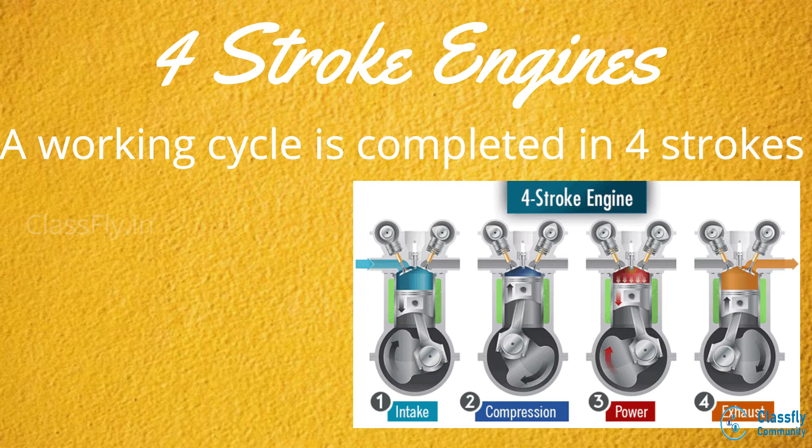Here, two revolutions of the crankshaft will complete one cycle. The four different strokes performed are suction stroke, compression stroke, power stroke and the exhaust stroke. Four-stroke engines are commonly used as a four-stroke petrol engine and a four-stroke diesel engine.

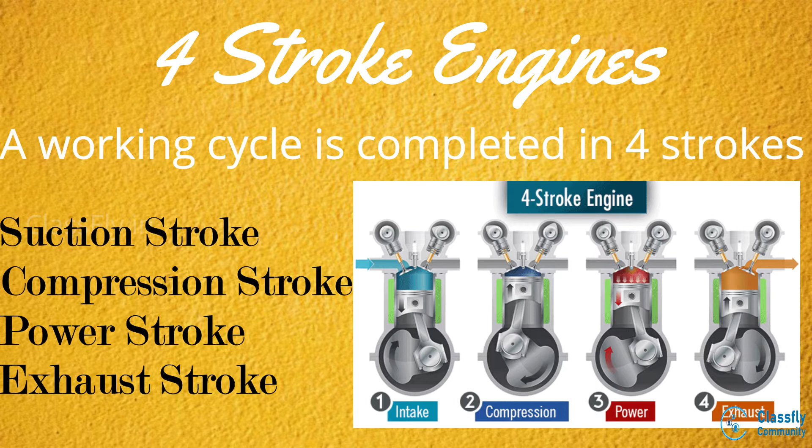Now let us study the working of a four-stroke petrol engine. A four-stroke petrol engine works on the Otto cycle, that is, the combustion of fuel will take place at a constant volume. The charge used in this engine is a mixture of air and petrol. This charge will be ignited by the sparks generated by a spark plug.

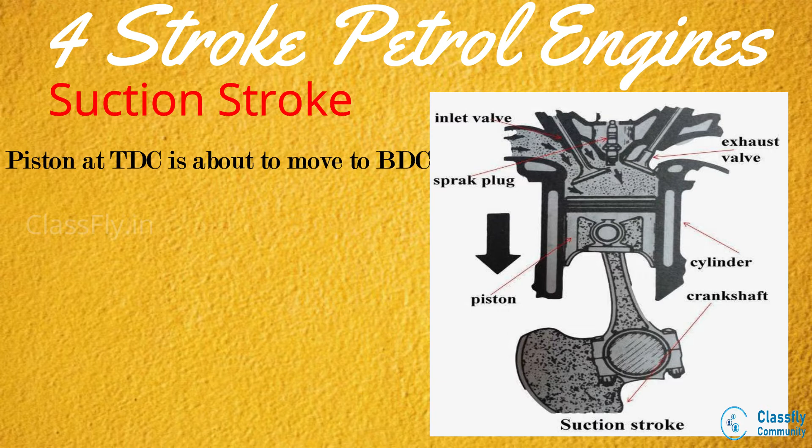Now let us study its working. First, the suction stroke. In the beginning of this stroke, the piston will be at its top dead center and will be about to move towards the bottom dead center. At this instant, the inlet valve is opened and the exhaust valve remains closed. The downward movement of the piston will create a space in the cylinder head and hence a partial vacuum.

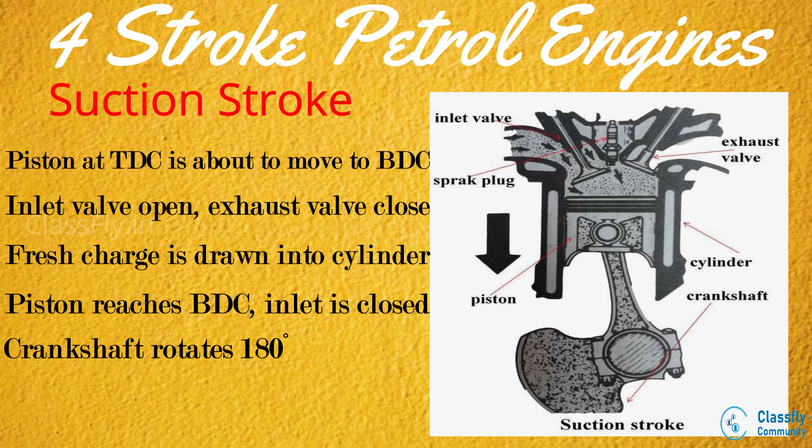Due to this, a fresh charge of air and petrol mixture will be drawn into the cylinder through the inlet valve. Now, when the piston reaches the BDC, the suction stroke ends and hence the inlet valve is closed. It is notable that after the completion of this stroke, the crankshaft rotates through an angle of 180 degrees, making half revolution.

Next, the compression stroke. In this stroke, the piston which is at the BDC will now move to the TDC. Both the inlet and exhaust valves will remain closed. As the piston moves upwards, the air and petrol mixture in the cylinder will get compressed to a high pressure and temperature.

This compression process will be adiabatic, that is, there will be no heat transfer between the system and the surrounding. Now, when the piston is about to reach the top dead center, the spark plug will initiate an electric spark that will ignite the air-petrol mixture. Hence, the combustion of fuel will take place at a constant volume, since the quantity of fuel inside the cylinder has not changed. Due to this, these engines are also called constant volume cycle engines.

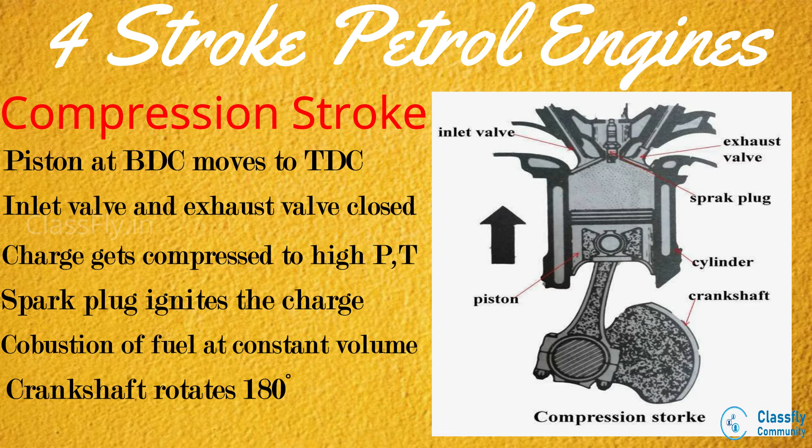Hence, after the completion of this stroke, the crankshaft rotates by another 180 degrees, now together making one complete revolution. The energy required for the suction stroke and the compression stroke's piston movement is taken from the flywheel.

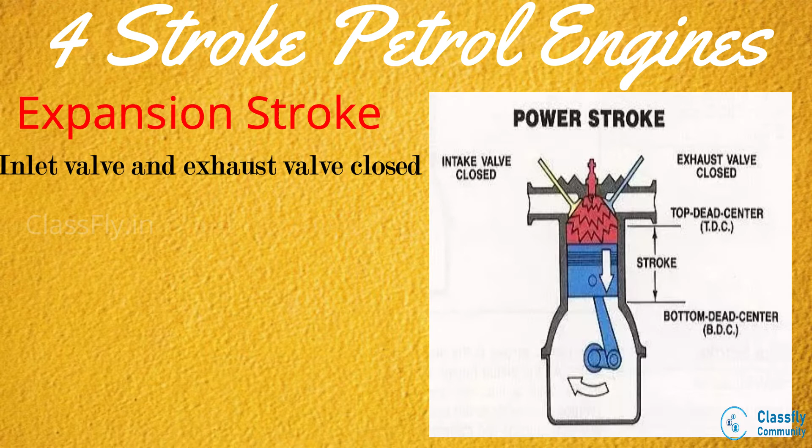Next, the power stroke. In this stroke, both the valves will remain closed. As the combustion of fuel takes place, the burnt gases will expand and hence exert a large force on the piston. This will cause the piston to move rapidly from the top dead center to the bottom dead center.

Hence, this force will then be transmitted to the crankshaft through the connecting rods. This will cause the crankshaft to rotate at high speeds. The crankshaft then transmits the power through clutches, gears, etc., to turn the wheels of the vehicle.

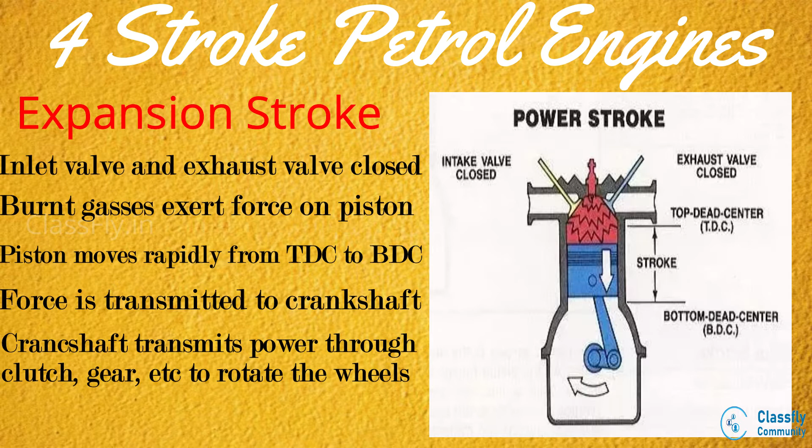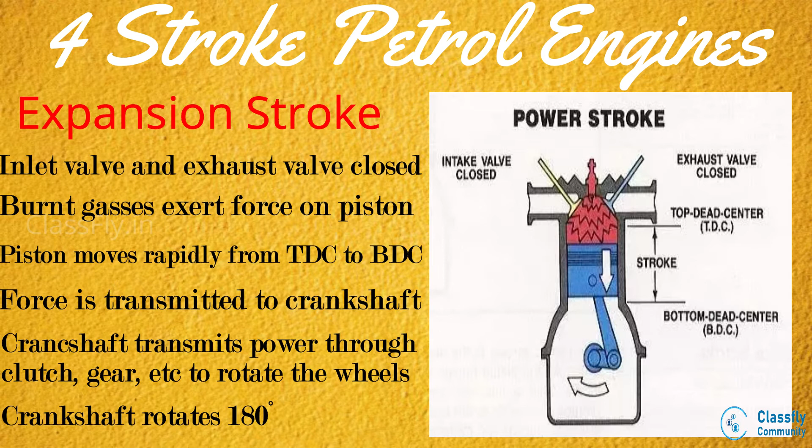The expansion of the gases taking place in this stroke is also adiabatic. Since the actual power is produced by the engine in this stroke, the name is power stroke. At last, we have the exhaust stroke.

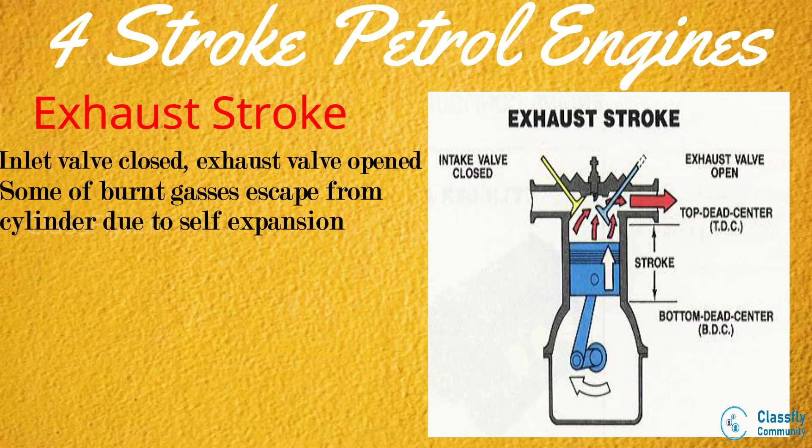At the end of the expansion stroke, the exhaust valves will be opened, while the inlet valve will still remain closed. A part of the burnt gases, due to their own expansion, escapes out of the cylinder through these exhaust valves. Now, the exhaust stroke will begin when the piston starts moving from the bottom dead center to the top dead center. The energy for this stroke will be supplied by the flywheel, which has absorbed the previous stroke's energy.

Now, as the piston moves upwards, it will force the remaining burnt gases to move out of the cylinder through the exhaust valve. Hence, when the piston reaches the top dead center, all the exhaust gas is moved out and the exhaust valve will close. This will complete one working cycle.

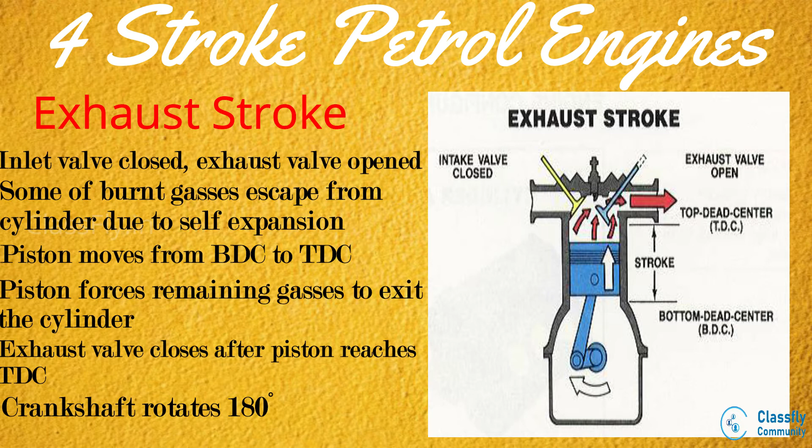The same cycle will be repeated again and again to produce continuous power. The crankshaft will complete one more revolution on the completion of the power stroke and the exhaust stroke. Hence, one working cycle is completed when the crankshaft performs 2 revolutions.

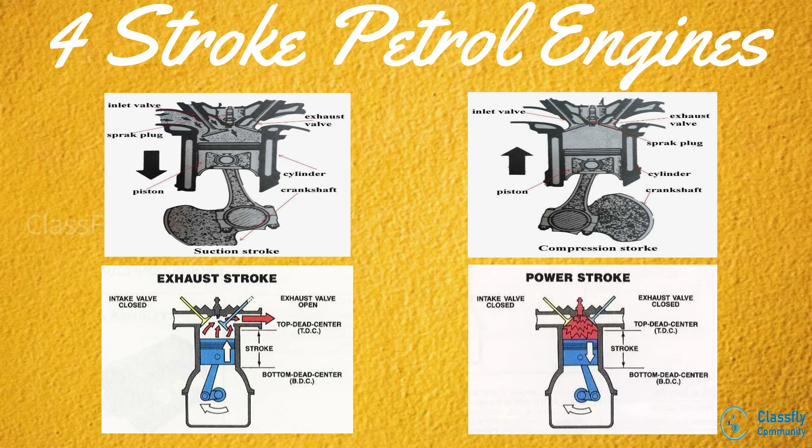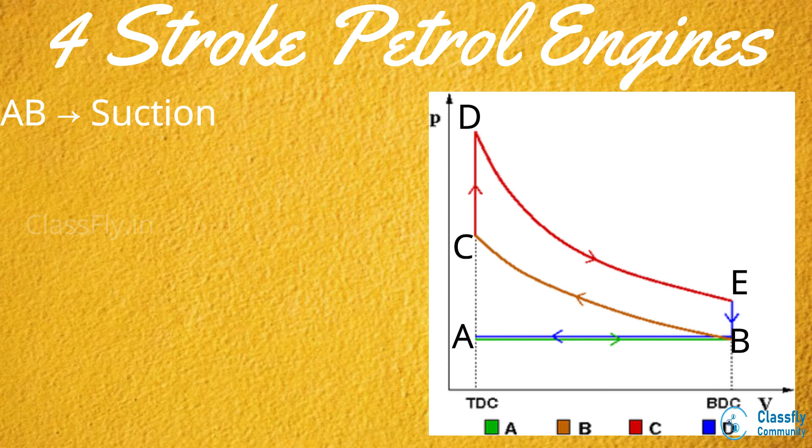Now let us look into the PV diagram, that is the pressure volume diagram for these engines. The suction of air in the suction stroke takes place at atmospheric pressure. Hence, the line AB represents the suction stroke. Now, in compression stroke, the compression of the gases takes place adiabatically, which is represented on the curve BC.

In the same compression stroke, the combustion of fuel will take place at a constant volume. This is represented by the line CD. Now, the expansion of the exhaust gases takes place adiabatically in the power stroke. This is represented by the curve DE.

Also, the drop in pressure occurring from the discharge of gases due to their own expansion happens at a constant volume. This is represented by the line EB. Also, the discharge of the remaining burned gases to the atmosphere happening in the exhaust stroke takes place at atmospheric pressure. Hence, this process is represented by the line BA.

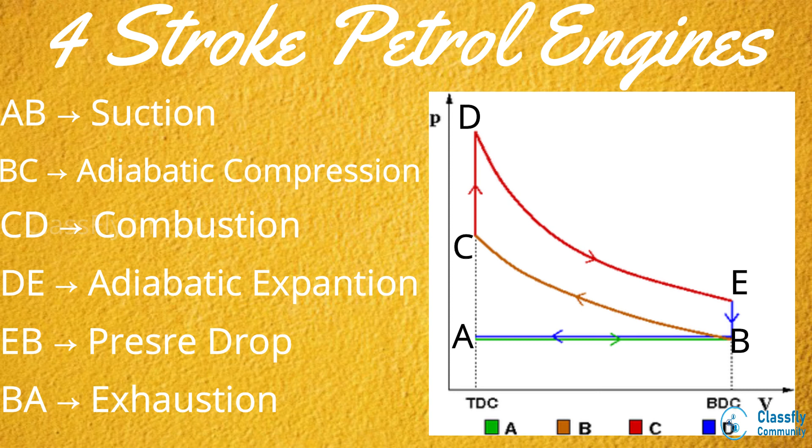Four-stroke engines find their applications commonly in scooters, motorbikes, cars, etc.